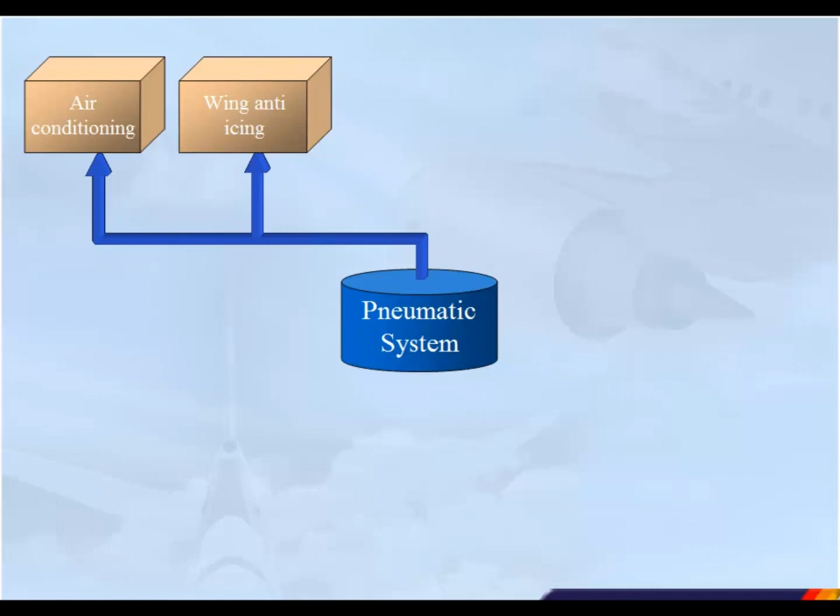The A330 pneumatic system supplies high-pressure air for air conditioning, wing anti-icing, water pressurization, hydraulic reservoir pressurization, and engine starting.

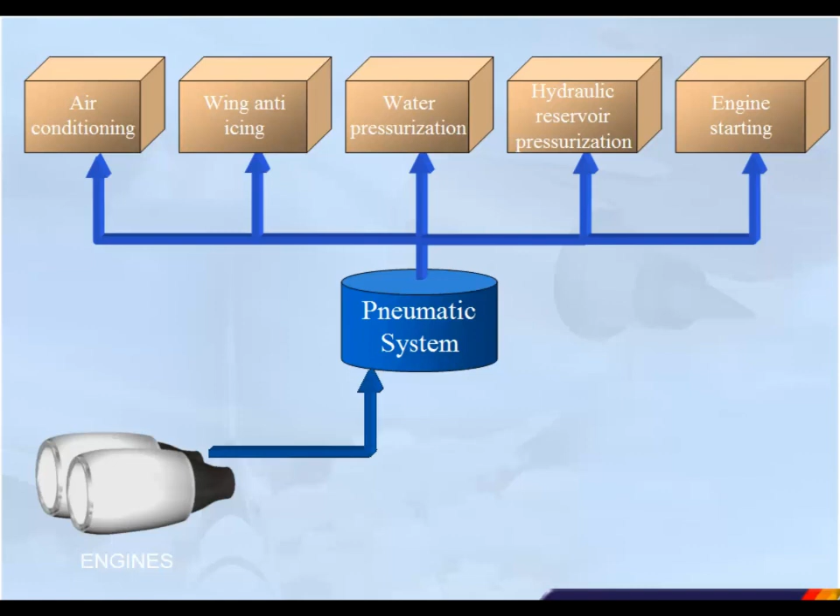High-pressure air can be supplied from three kinds of sources: the engine bleed system, the APU, and two external high-pressure ground power units. Note: wing anti-icing is not permitted when the pneumatic system is supplied by the APU bleed.

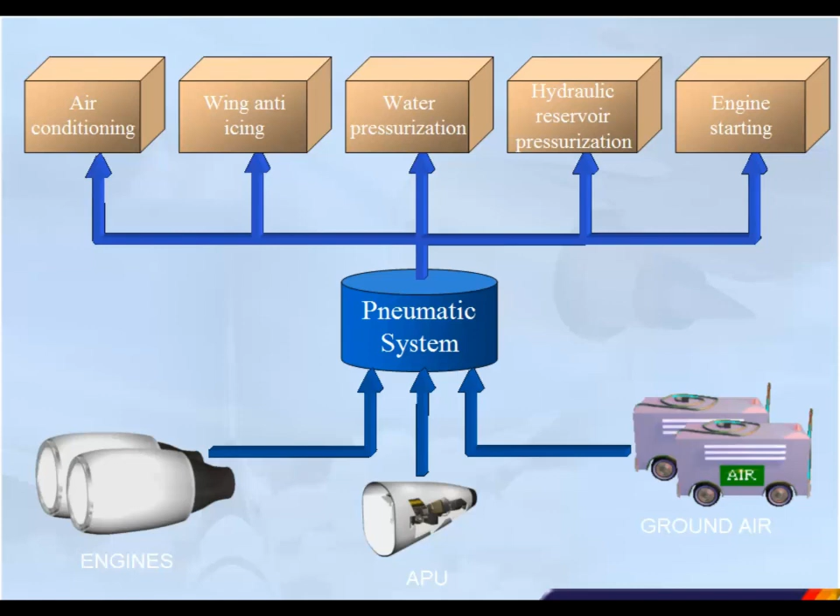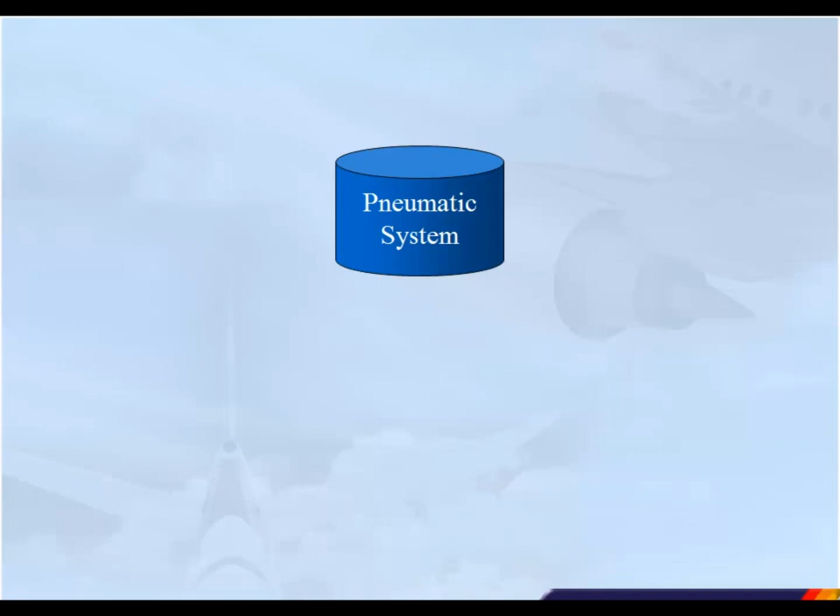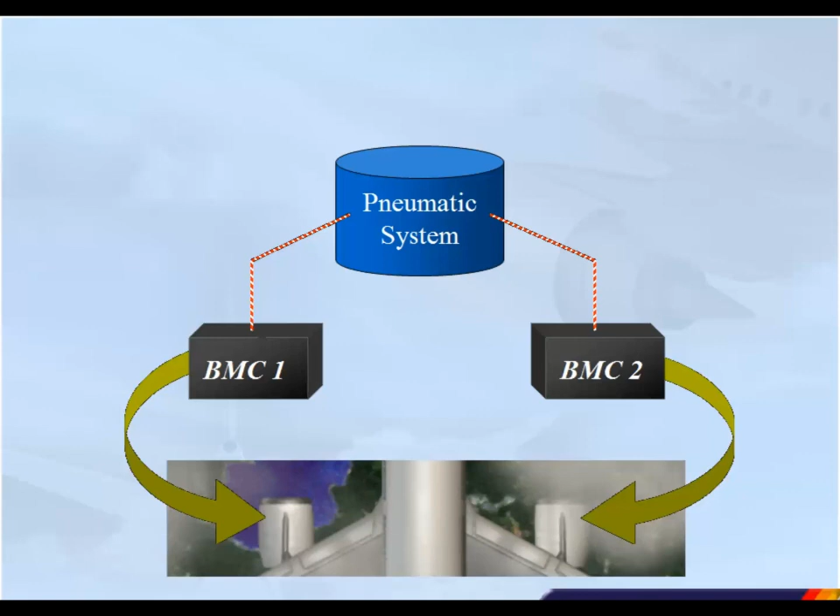The pneumatic system is controlled and monitored by two bleed monitoring computers, BMC. There is one BMC for each engine bleed system. Both BMCs are interconnected, and if one fails, the other takes over most of its functions.

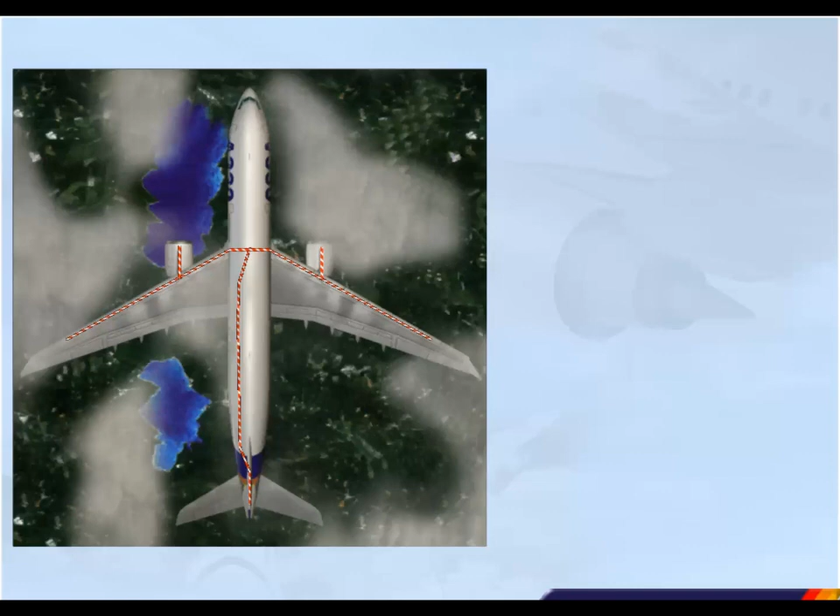There are air leakage detection loops installed in the vicinity of the hot air ducts in the fuselage, wings, and pylons. If a leak is detected, a signal is sent to the BMCs, which automatically isolate the affected area.

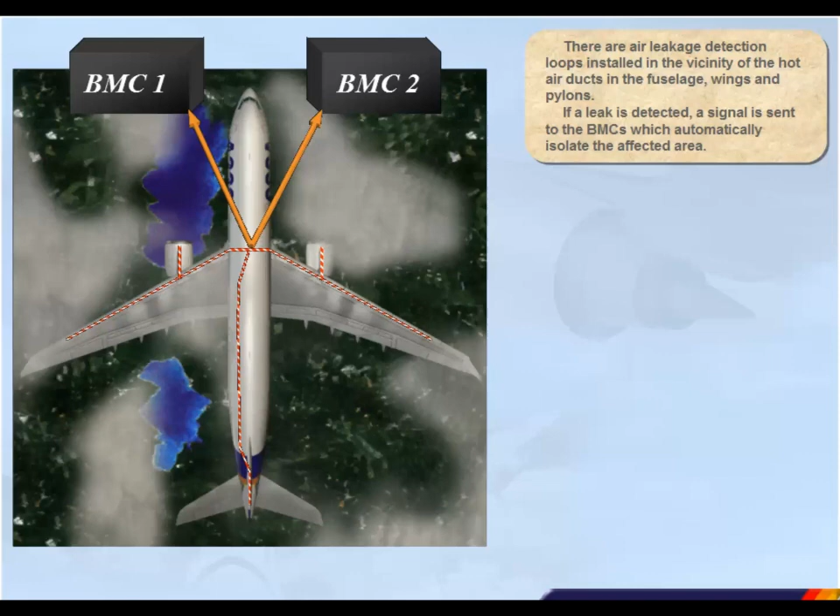In flight, the primary source of high-pressure air is the engines. Both engines' bleed systems are similar.

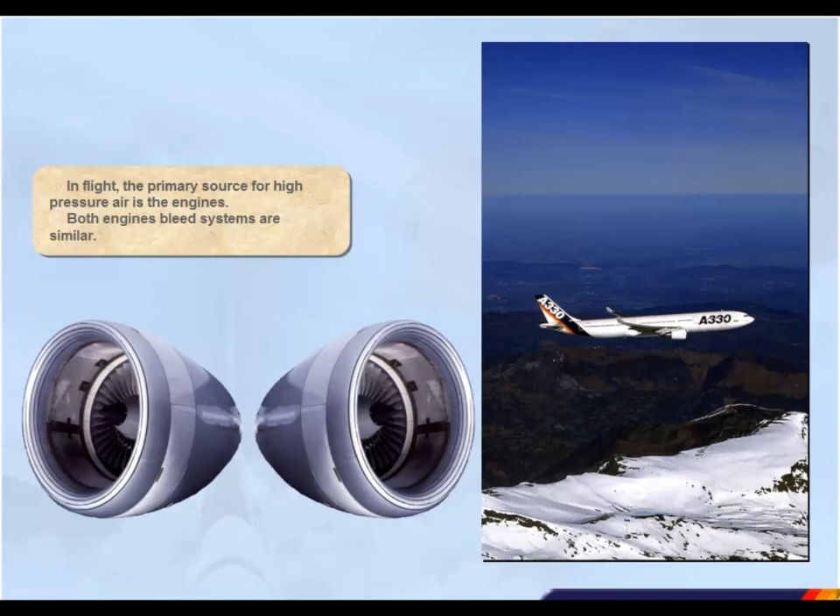Air is bled from two compressor stages of the engine: the intermediate pressure, IP port, and the high pressure, HP port.

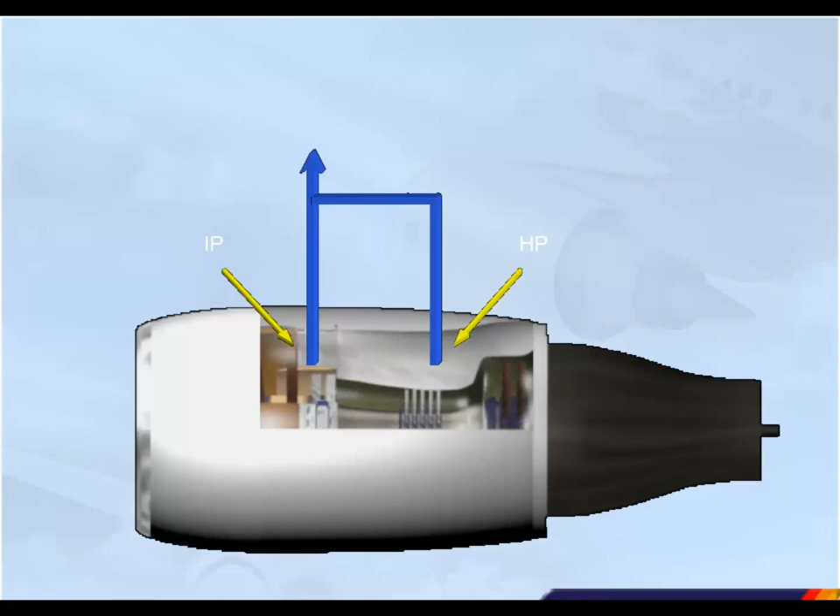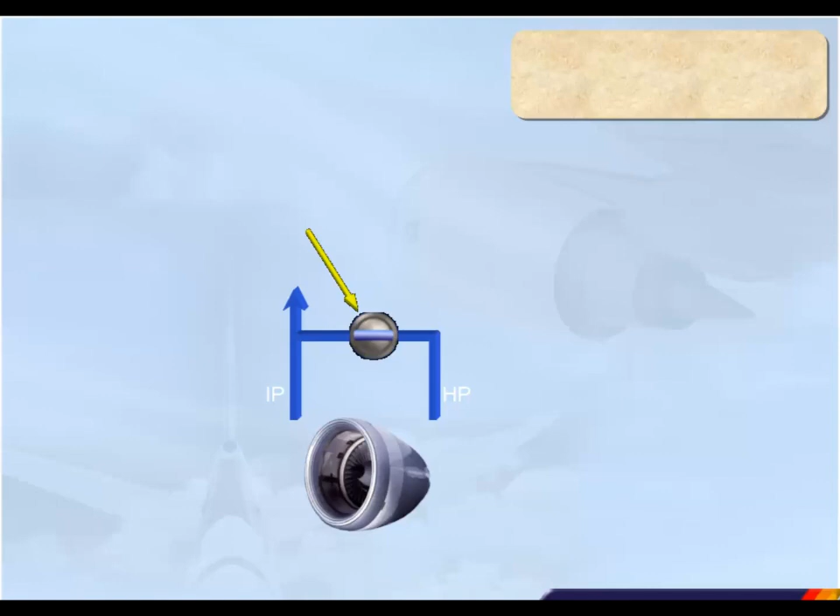There is an HP valve which can cut off bleed air from the high pressure port. It is automatically controlled by the system. The high pressure section, HP, is only used when there is insufficient pressure from the intermediate output, IP, i.e. when the engines are at idle. Once the engine speed is high enough, the IP is sufficient, and the HP valve closes.

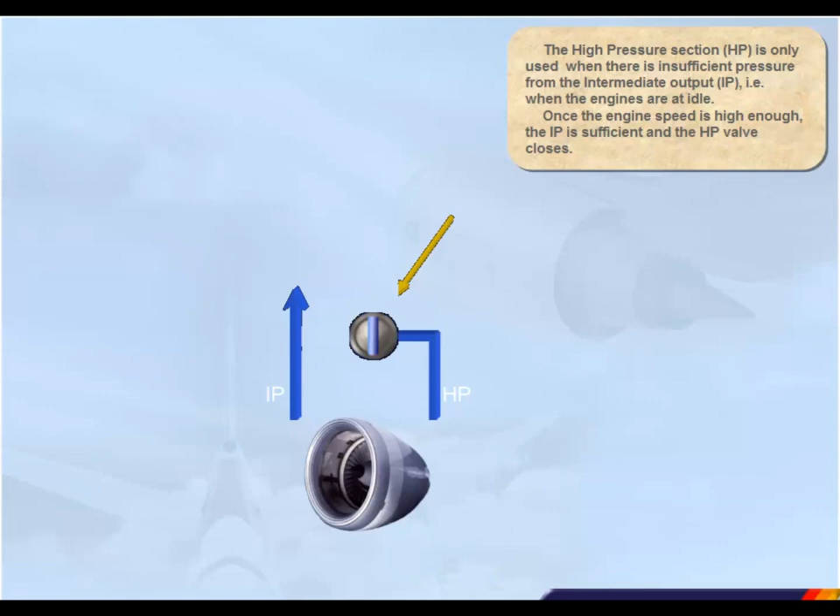The air extracted from the compressor then goes to a bleed valve, which acts as a shutoff and pressure regulating valve.

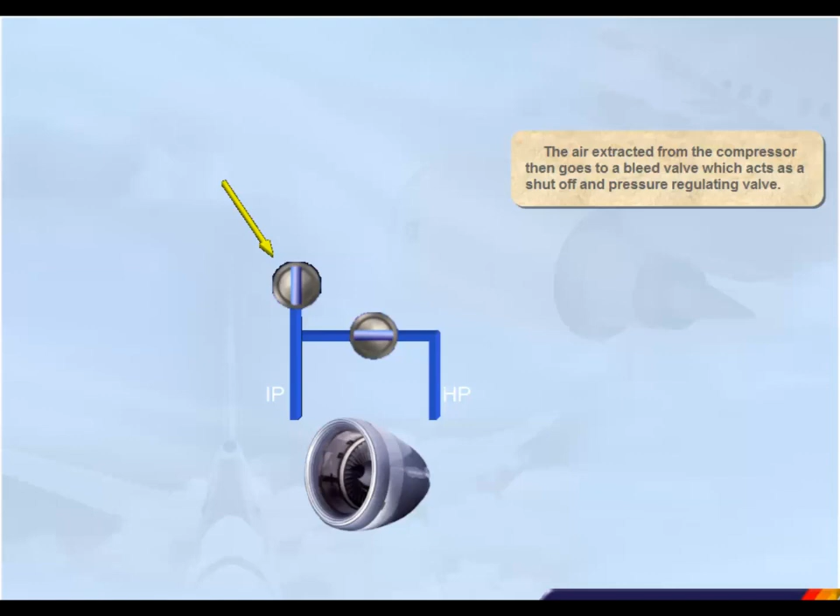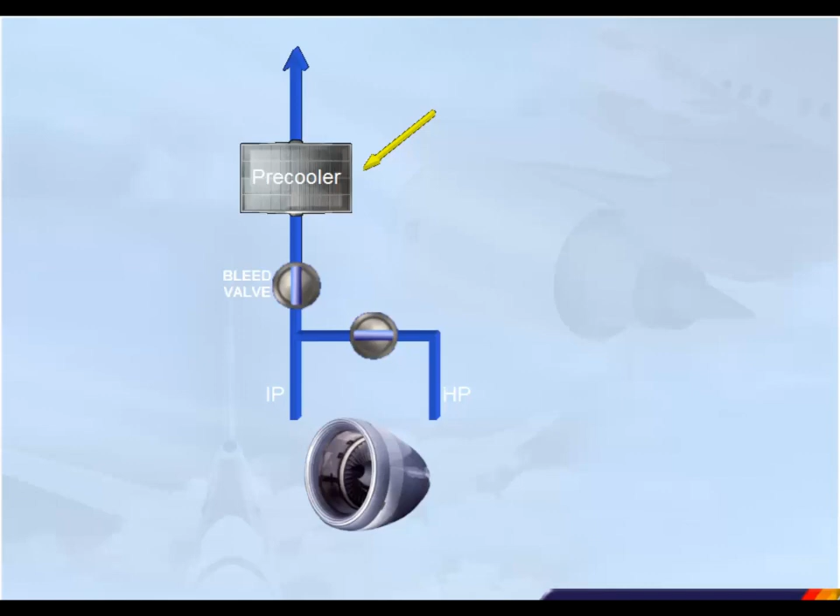Since the temperature of the bleed air is high, it passes through a pre-cooler before being distributed to the users. The pre-cooler uses cool air from the engine fan to regulate the temperature.

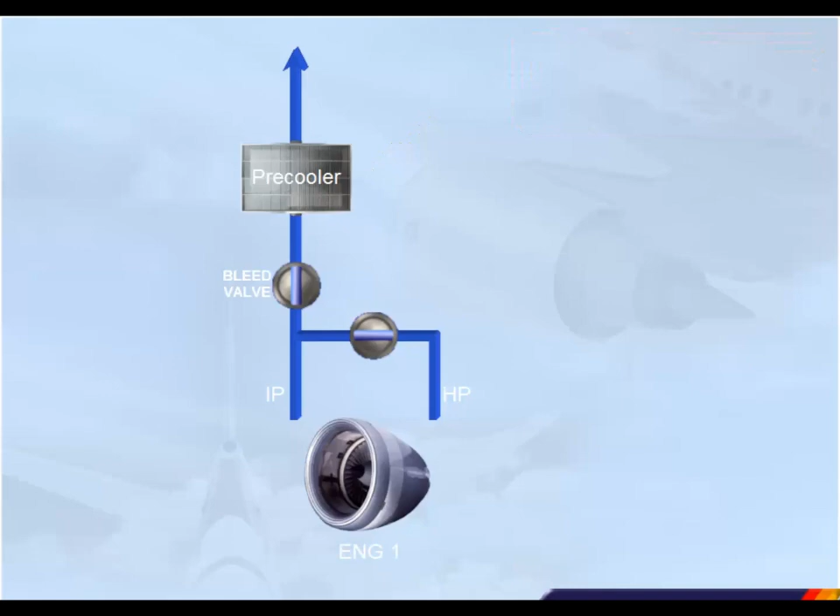Engine 2 has an identical bleed system. Click on the blue box to display the Engine 2 bleed system.

Both systems are connected by a crossbleed duct. A crossbleed valve permits their interconnection or isolation.

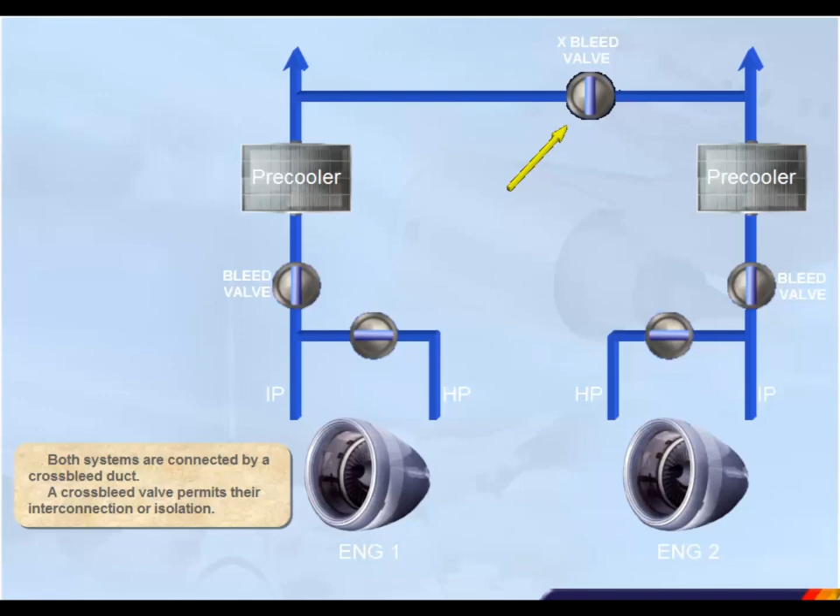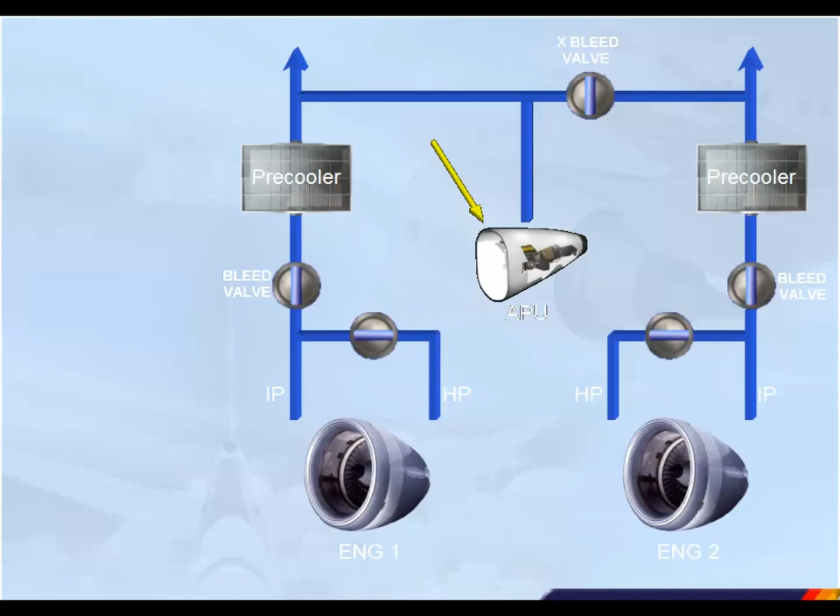The APU can also be used for bleed air supply. This is usually done on ground for air conditioning and for engine start. However, APU bleed air is also available in flight.

APU bleed air is controlled by the APU bleed valve, which operates as a shutoff valve.

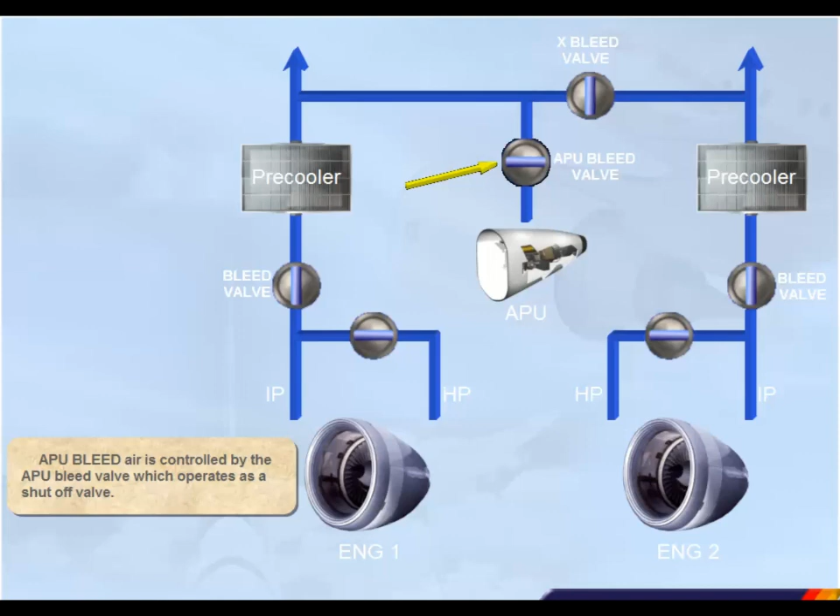Should the APU not be available, a high-pressure ground power unit can be connected. This completes the pneumatic system.

We will now show you how system information is displayed to the pilots.

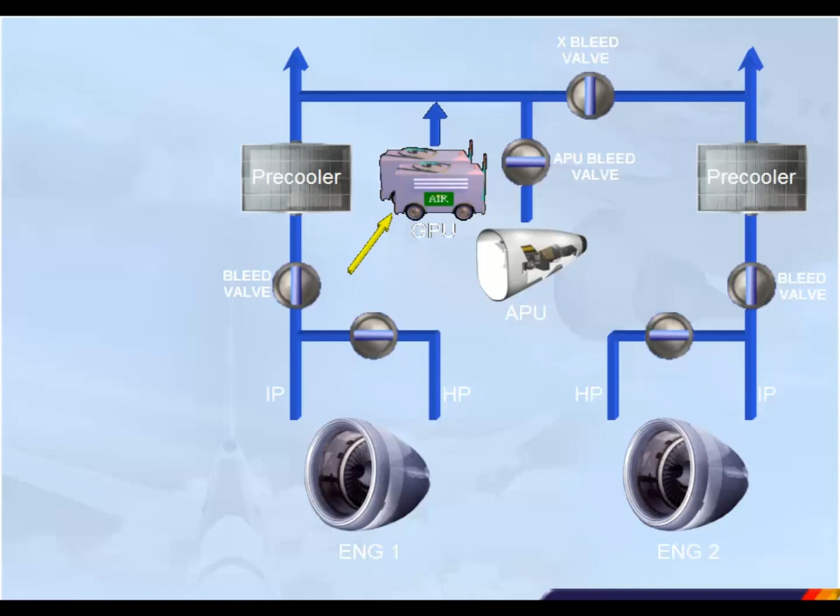The pneumatic system is displayed on the ECAM bleed page. Click on the diagram to display the ECAM bleed page.

Information on the pneumatic system is displayed on the lower part of the ECAM bleed page. Note, we have shaded the upper part of the ECAM bleed page because it is related to the air conditioning chapter. This will be covered in a later module.

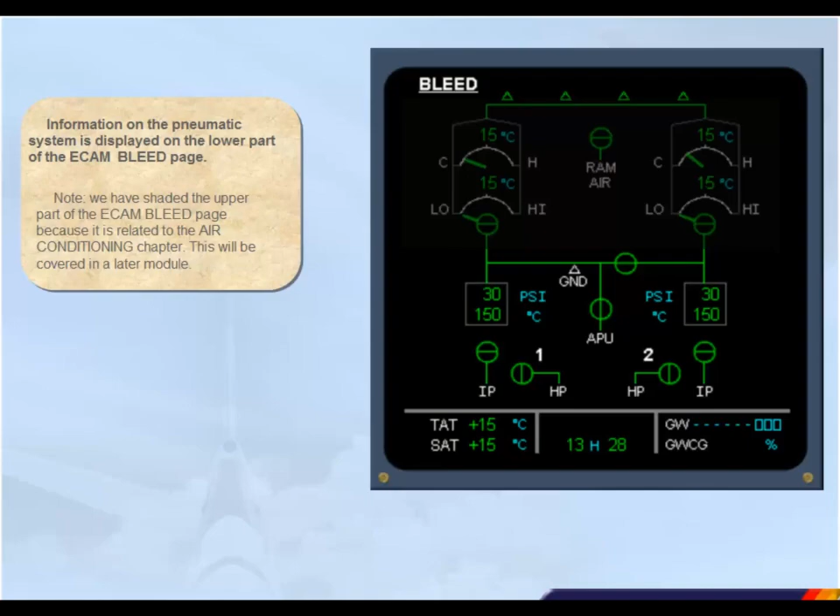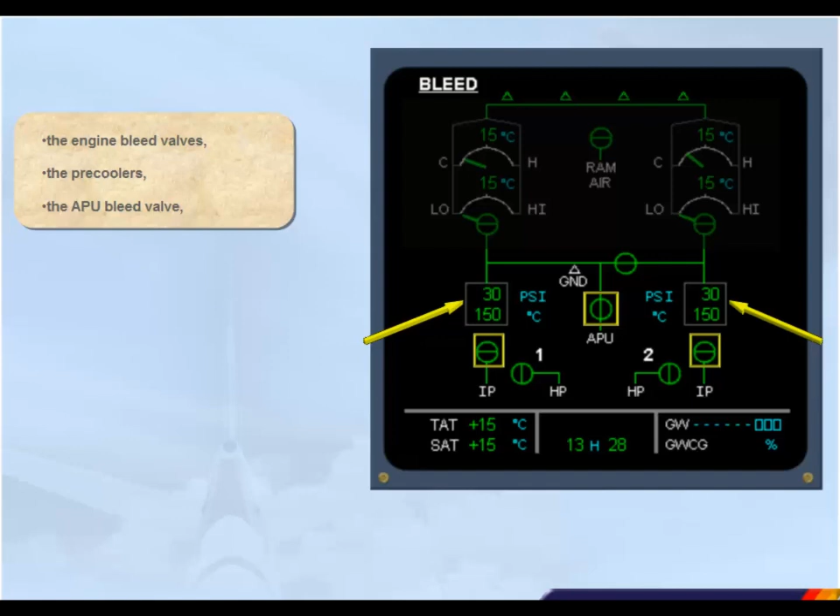Let's identify the system components on the ECAM page now: the IP and HP ports, the HP valves, the engine bleed valves, the pre-coolers, the APU bleed valve, the cross-bleed valve, and the high-pressure ground connection.

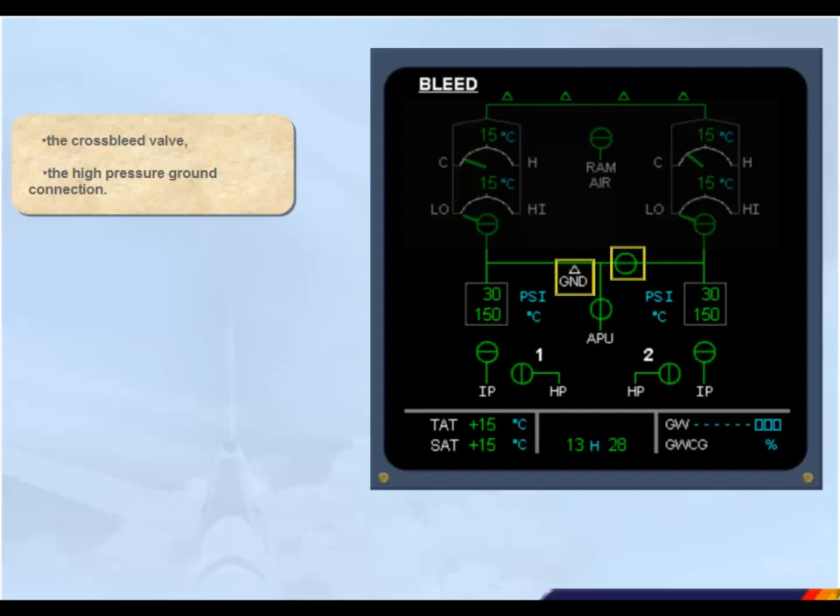The following information is also displayed: bleed air pressure, bleed air temperature, and engine identification numbers.

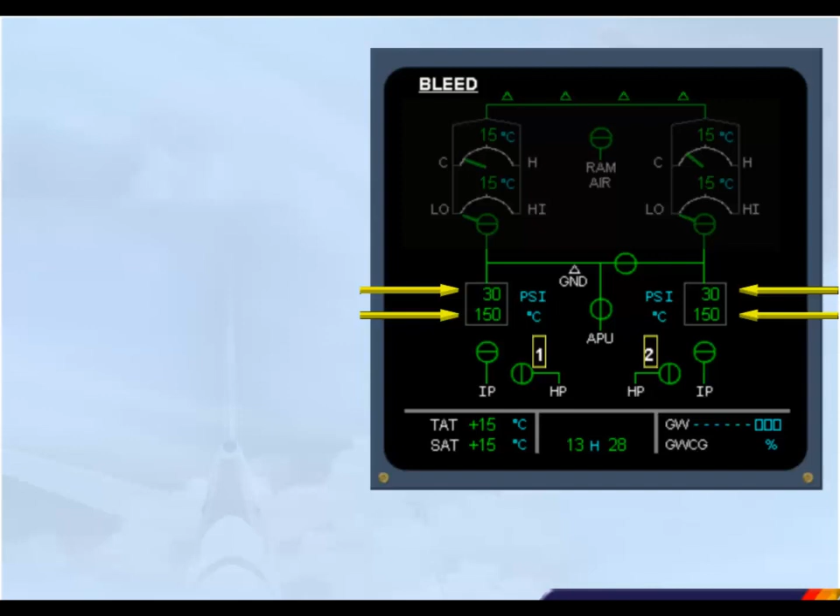Controls for the pneumatic system are part of the air conditioning panel, located on the overhead panel. Again, we have shaded those controls which belong to the air conditioning chapter.

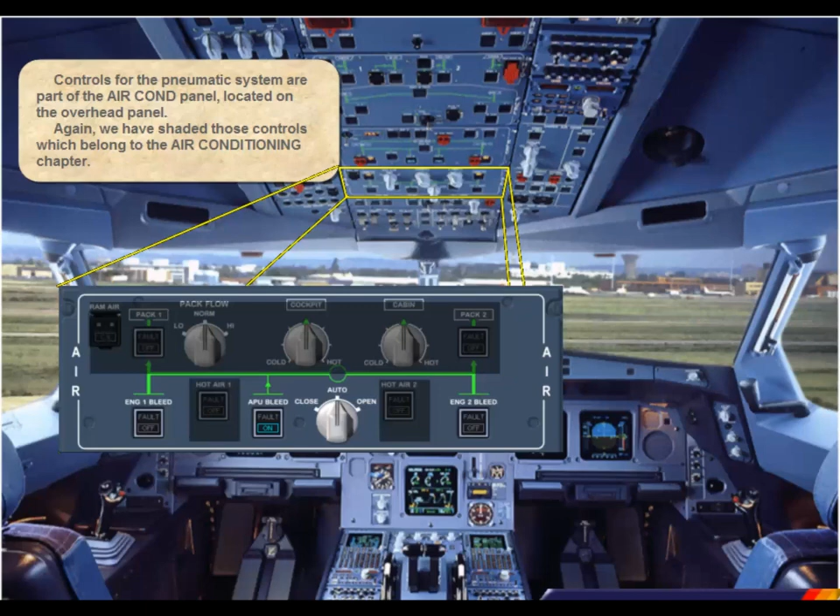Each engine bleed valve is controlled by its associated push-button switch on the air conditioning panel. The APU bleed valve is controlled by its associated push-button switch.

The cross-bleed selector enables the pilot to open and close the cross-bleed valve manually, or to let the system operate the cross-bleed valve automatically.

You will learn to interpret all the indications and operate these controls in the normal and abnormal operation modules.

You are doing the preliminary cockpit preparation. To better illustrate what occurs in the pneumatic system, select the ECAM bleed page using the ECAM control panel.

Let's talk about the indications on the ECAM bleed page. The engine identification numbers are displayed amber because the engines are not running.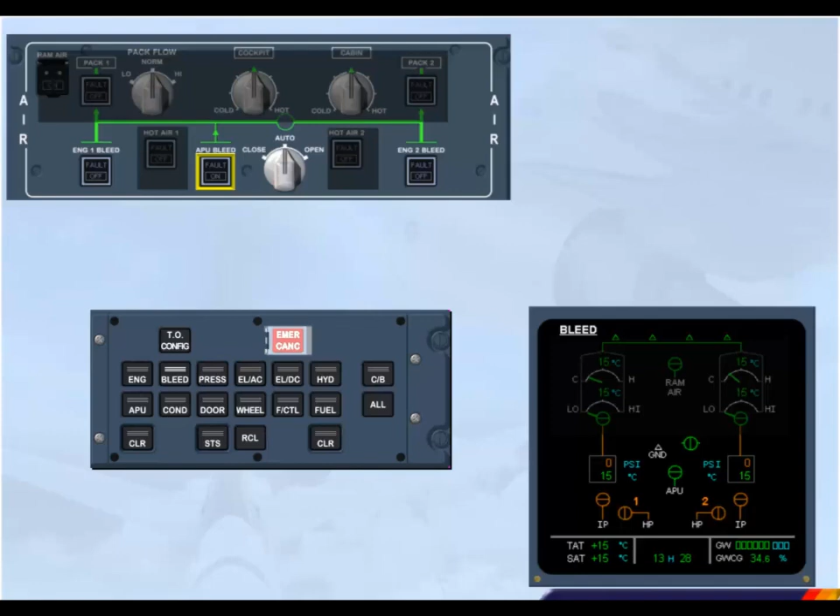Since the APU bleed push-button switch is selected off with APU running, the APU bleed valve is displayed cross-line green, indicating that it is closed.

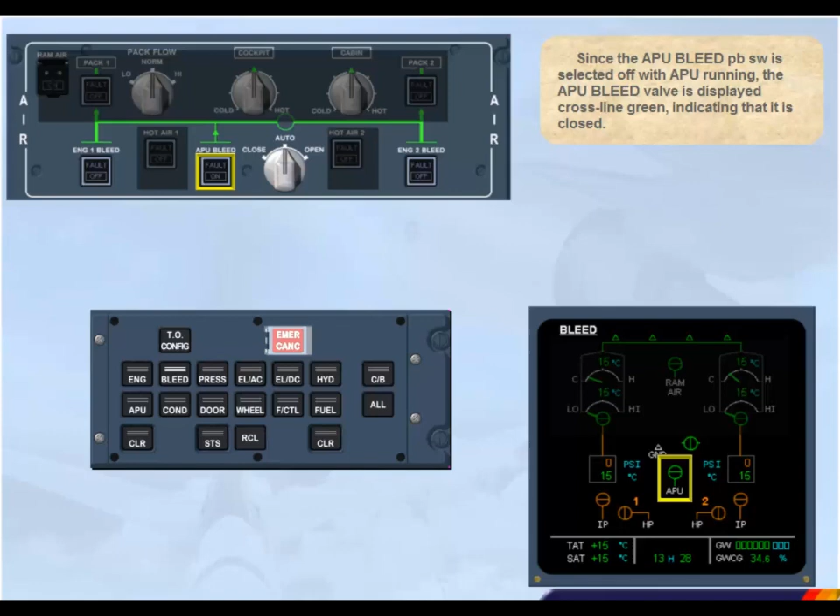The next step during cockpit preparation is to switch the APU bleed on. We have already started the APU for you. Note, do not use APU bleed if ground high pressure air is connected. Switch APU bleed on.

Observe the indications. The APU bleed valve is displayed inline green, indicating it is now open. The left side bleed pressure and temperature are displayed in green because they are in the normal range. The crossbleed valve is automatically opened, displayed amber during transit and inline green when fully open. The right side bleed pressure and temperature are now also displayed in green. As you have learned in the APU chapter, the memo APU bleed is displayed on the engine warning display.

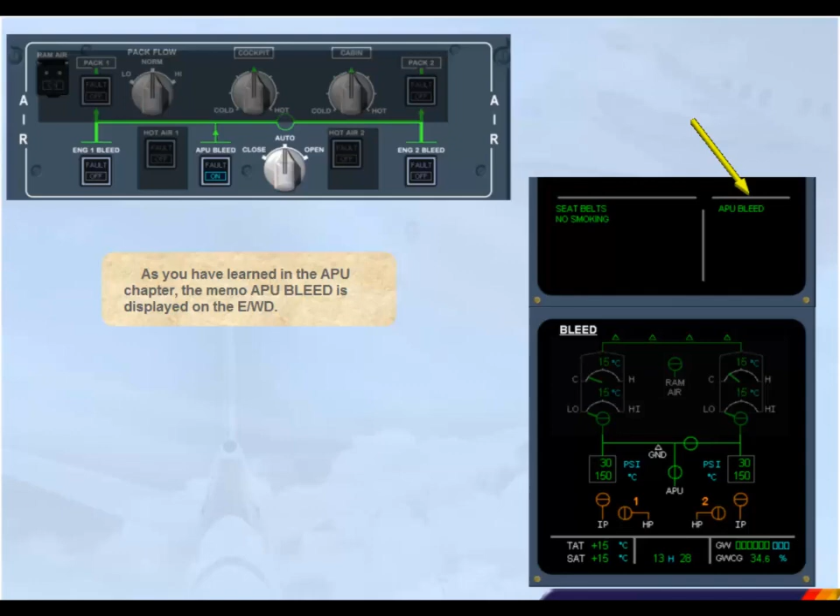The next step is the walk-around. If ground high-pressure air is not required, you have to check that the high-pressure ground connection door is closed.

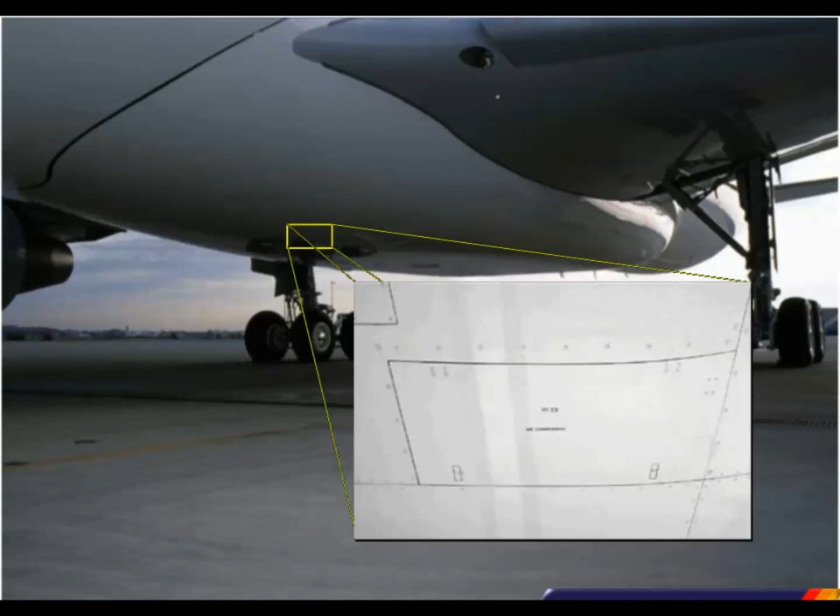Usually, APU bleed air is used for engine start. The pressure displayed on the bleed page is also indicated on the ECAM engine page, which will be explained in the engine chapter.

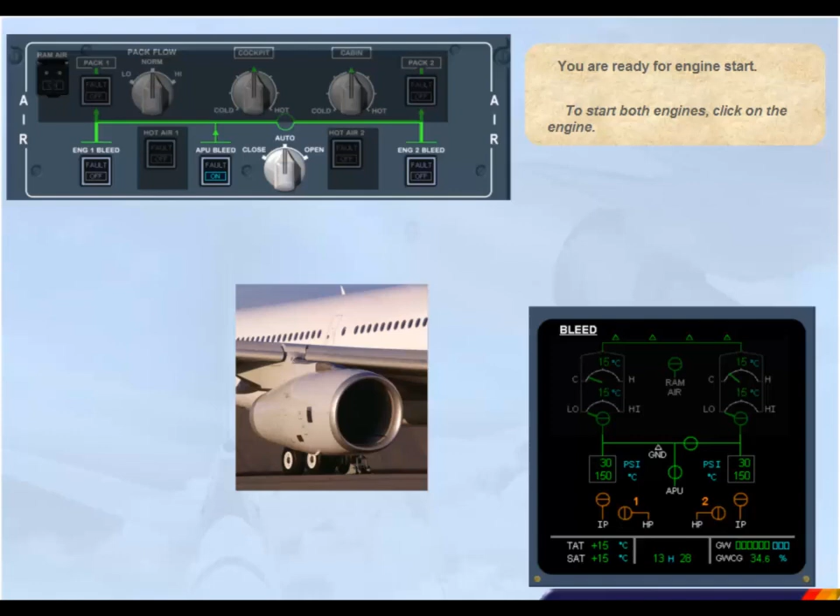You are ready for engine start. To start both engines, click on the engine. Notice that the engine identification numbers have turned white, indicating that the engines are running. The engine bleed valves remain closed because the APU bleed valve is open, and the APU has priority over the engine bleed.

Now you may switch off the APU. Switch APU bleed off. Observe the ECAM.

The APU bleed valve is closed. The crossbleed valve is automatically closed, displayed amber during transit. The engine bleed valves and HP valves are displayed inline green because they have been automatically opened.

We will now switch off the APU. Click on the APU master switch. With the APU master switch push button in the off position, the APU bleed valve is no longer displayed on the ECAM.

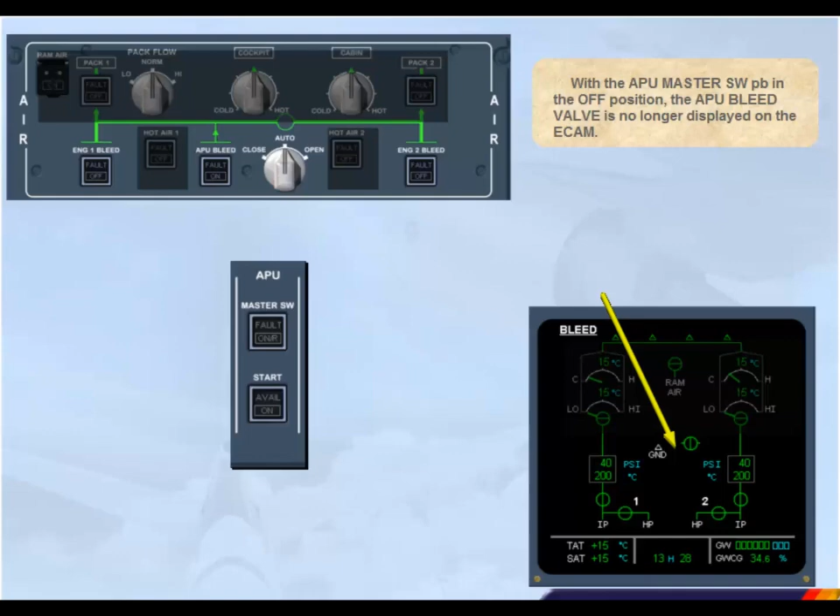We will now talk about the changes that occur in the pneumatic system during takeoff. Note, normally the ECAM engine page is displayed for takeoff. For training purposes, we will display the ECAM bleed page.

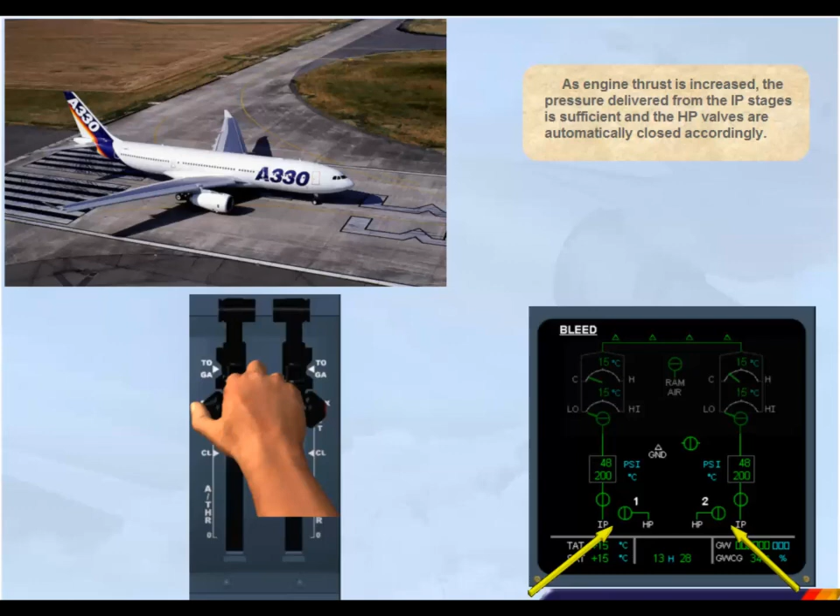As engine thrust is increased, the pressure delivered from the intermediate pressure stages is sufficient, and the high pressure valves are automatically closed accordingly. As soon as the aircraft lifts off, the ground high pressure connection indication disappears. Remember that it is only displayed on the ground.

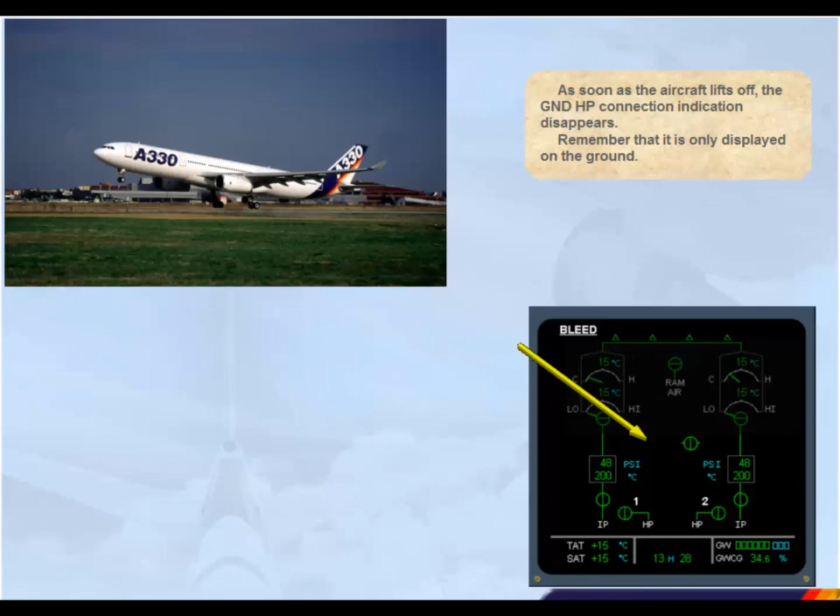During flight, you may need to switch on the wing anti-ice system, which uses hot bleed air from the pneumatic system. Observe the indication on the ECAM bleed page when the wing anti-ice is used. Note, for further information, refer to the Ice and Rain Protection chapter. Wing anti-ice is not permitted when the pneumatic system is supplied by the APU bleed.

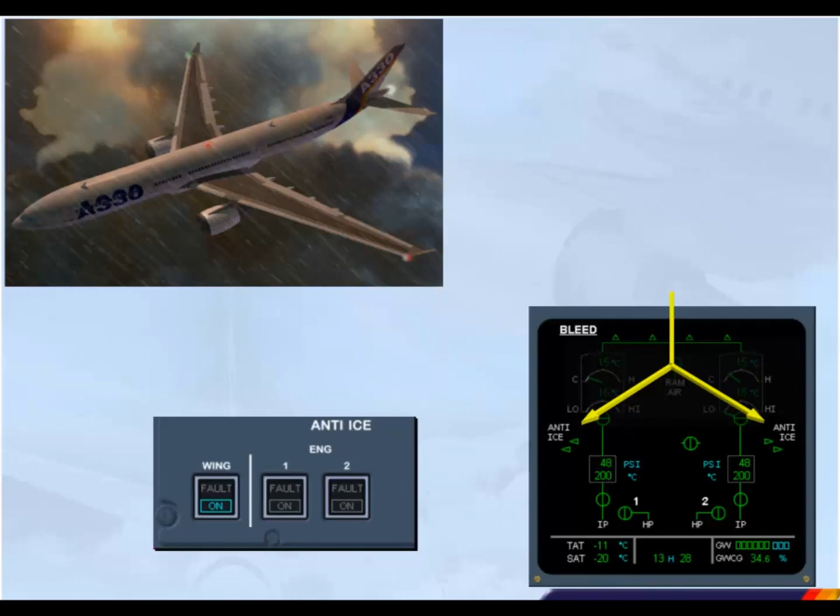Let's now see what happens in the pneumatic system when you are back on the ground. The ground high pressure air connection indication is displayed. With the engines at idle, the high pressure valves are automatically opened. When the APU is started, the APU bleed valve is displayed.

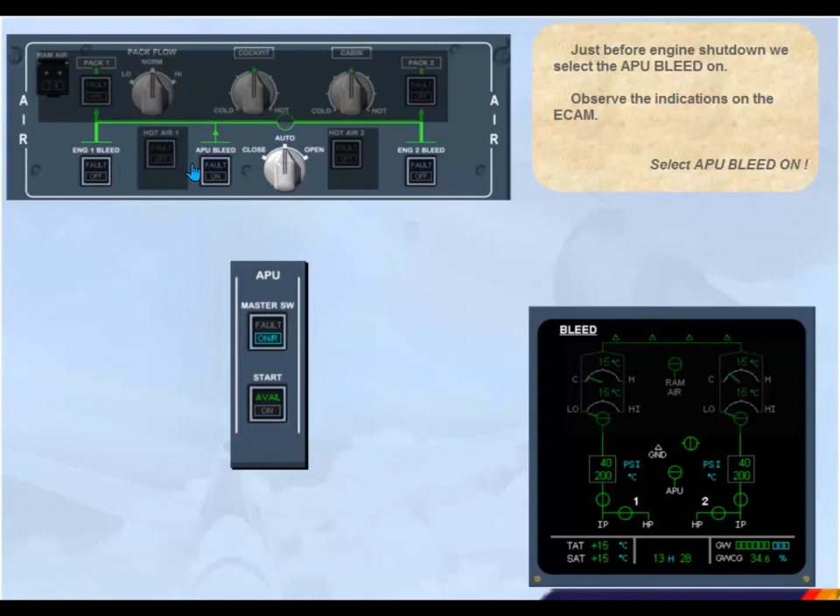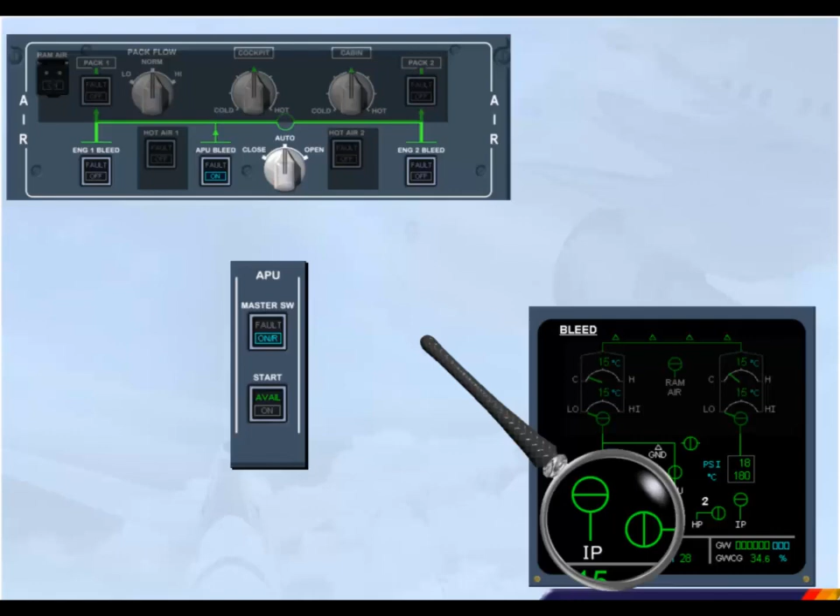Just before engine shutdown, we select the APU bleed on. Observe the indications on the ECAM. Select APU bleed on. The APU bleed valve opens. The engine bleed and high pressure valves are automatically closed because APU bleed air has priority. The cross bleed valve automatically opens in order to let the APU supply both sides of the pneumatic system.

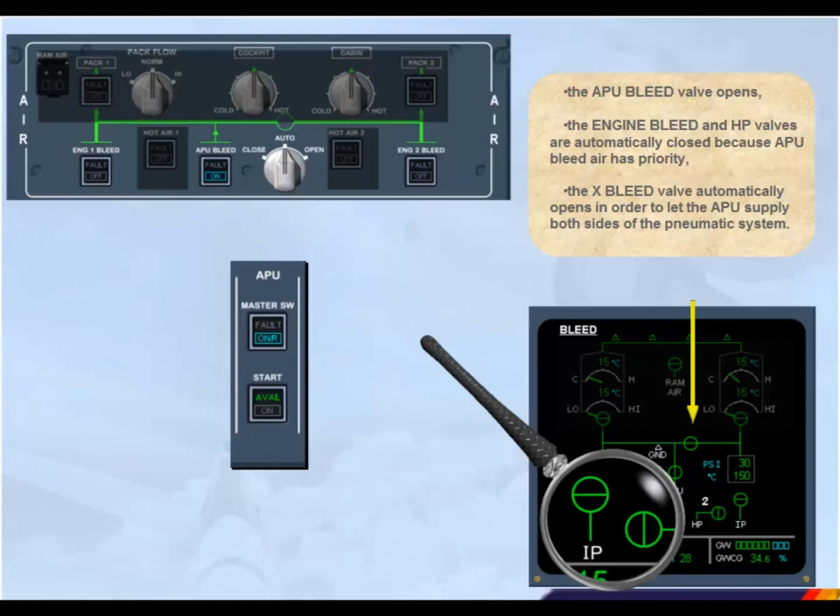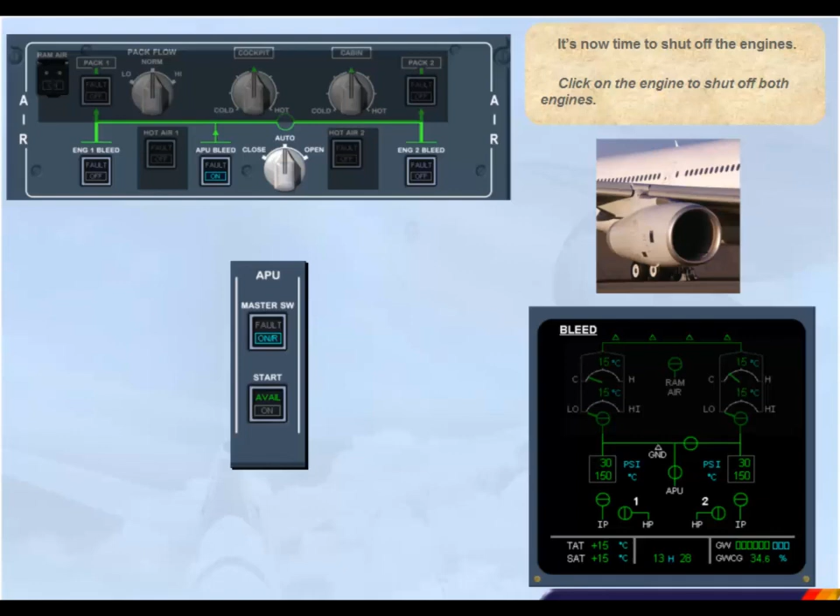It's now time to shut off the engines. Click on the engine to shut off both engines. Observe that the engine identification numbers turn amber because the engines are not running.

Before leaving the aircraft, we will shut down the APU. But first, we must switch off the APU bleed. Switch APU bleed off. Observe the indications. The APU bleed valve is closed. The bleed pressure is displayed amber because there is no pressure supplied.

When the APU has shut down, the APU bleed valve is no longer displayed. This completes the normal operation of the pneumatic system. We will now discuss the indications associated with ground high pressure air supply. Click on the forward arrow.

If the APU is inoperative for bleed air supply, a ground high pressure air unit can be connected to provide pneumatic pressure for engine start. The ground unit's pressure and temperature are indicated on the ECAM.

Notice that in this case, the crossbleed valve remains closed with the crossbleed selector in auto position. In order to start engine 2 first, you have to set the crossbleed selector manually to open. This is done according to the procedure in your FCOM.

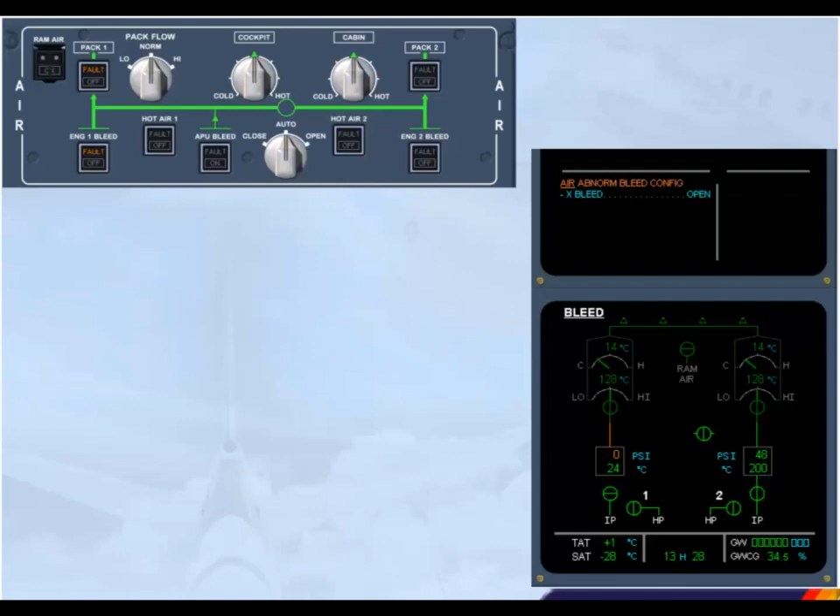Observe the ECAM. The cross-bleed valve is displayed amber during transit and inline green when fully open. The pressure and temperature values for the left side of the system are back to normal because now both sides are being supplied by engine 2.

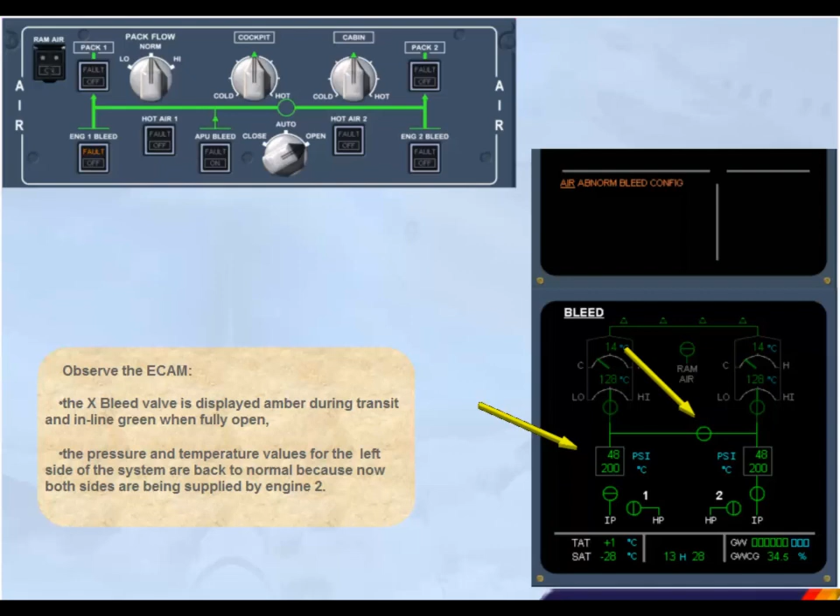After review and confirmation by the pilot flying, clear air.

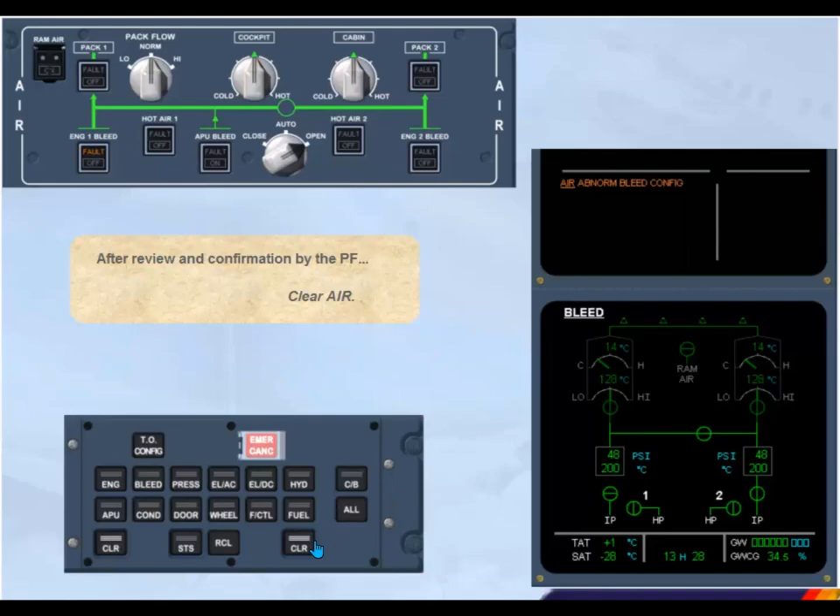If you need to use wing anti-ice, you will have to switch off one air conditioning pack. We will deal with this fact later. In the inoperative systems column, engine 1 bleed is listed.

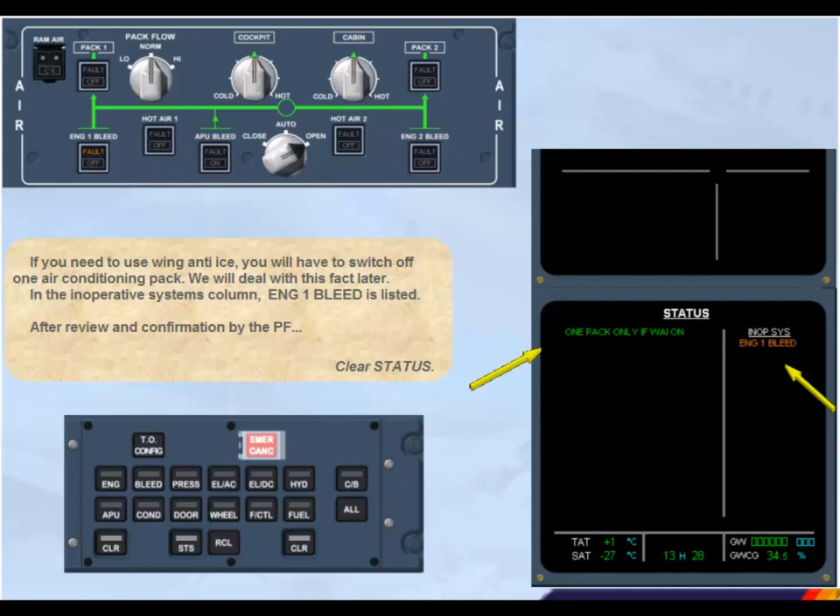After review and confirmation by the pilot flying, clear status. ECAM action completed.

Now we will see what happens if you have to use wing anti-ice with the engine 1 bleed still inoperative. Let's assume you encounter icing conditions during the remaining part of your flight, and you decide to switch on your wing anti-ice. Switch wing anti-ice on.

The engine 1 bleed fault procedure is automatically recalled on the engine warning display, and the ECAM procedure requires that you switch pack 1 off. This is because one engine bleed system is not sufficient to supply wing anti-ice and both air conditioning packs at the same time. Note: for more information about the packs, refer to the air conditioning chapter.

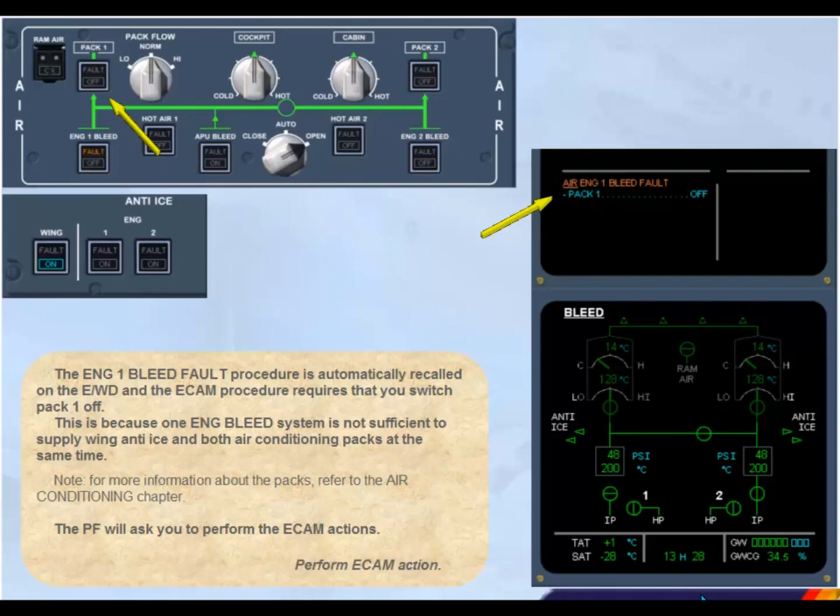The pilot flying will ask you to perform the ECAM actions. Perform ECAM action. After review and confirmation from the pilot flying, clear air.

On the status page, Pack 1 has been added to the inoperative systems column.

After review and confirmation by the pilot flying, clear status. ECAM action completed.

For training purposes, to teach you more about the pneumatic system, we will continue by adding another failure to your previous configuration. This will be a left wing leak. This does not seem to be your lucky day. Click on the forward arrow to activate the failure.

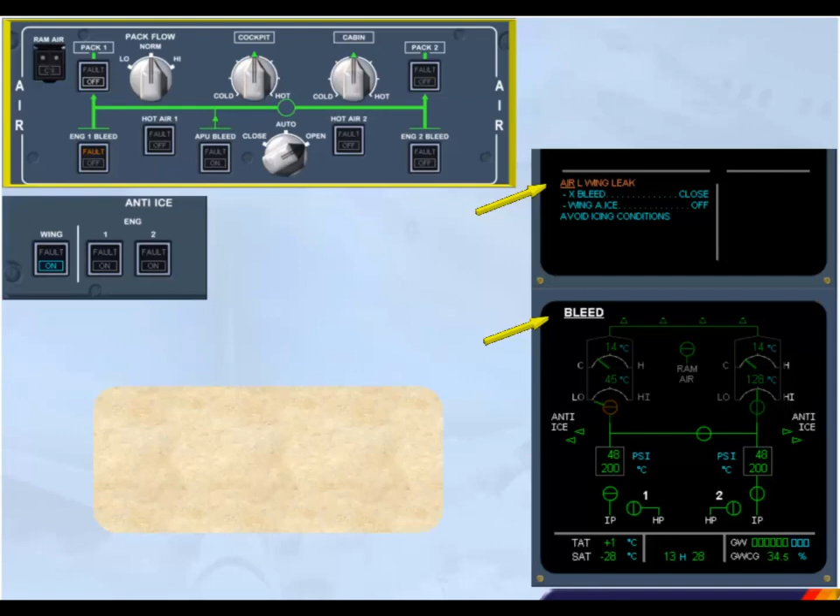On the engine warning display, read the title of the failure. On the system display, the ECAM bleed page is automatically presented. On the air panel, the indications from the previous failure remain unchanged. The title of the failure indicates that a bleed leakage in the left wing has been detected. The left side of the bleed system has to be shut down in order to prevent any damage from leaking hot air.

The first line of the ECAM procedure requires you to switch the crossbleed selector to the closed position. With the selector in auto position, the crossbleed valve would have been closed automatically, but remember, you have opened it manually in the previous procedure.

The pilot flying will ask you to perform the ECAM actions. Perform ECAM action.

Observe the indications. The crossbleed valve closes. The pressure of bleed system 1 returns to 0. Since there is no hot air supplied, the left wing anti-ice valve indication becomes amber. The wing anti-ice indications will be explained further in a later module.

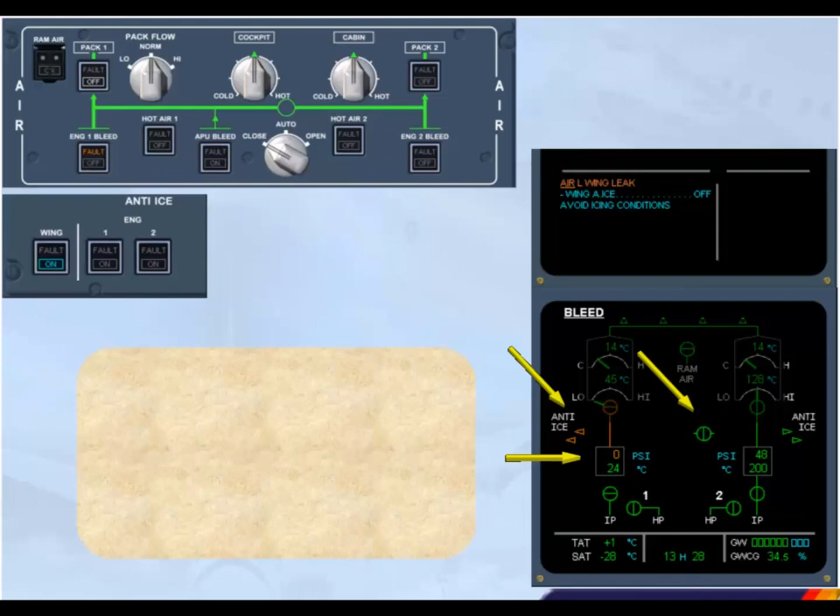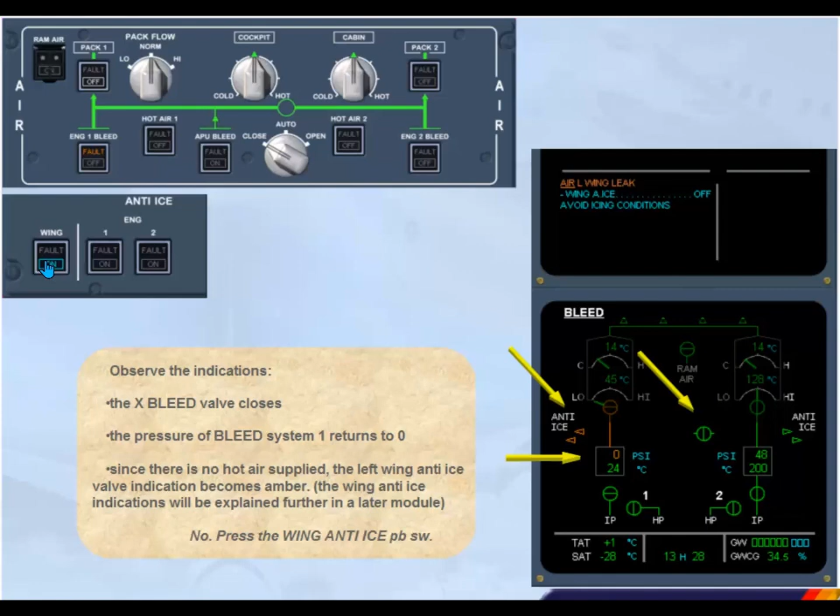Continue ECAM action. No. Press the wing anti-ice push button switch. The wing anti-ice was switched off because you do not want to de-ice one wing only.

The ECAM advises you to avoid icing conditions for the remaining part of the flight. After review and confirmation from the pilot flying, clear air.

The status page also informs you that you have to avoid icing conditions. The wing anti-ice has been added to the inoperative systems column. The engine 1 bleed and pack 1 remain from the previous failure.

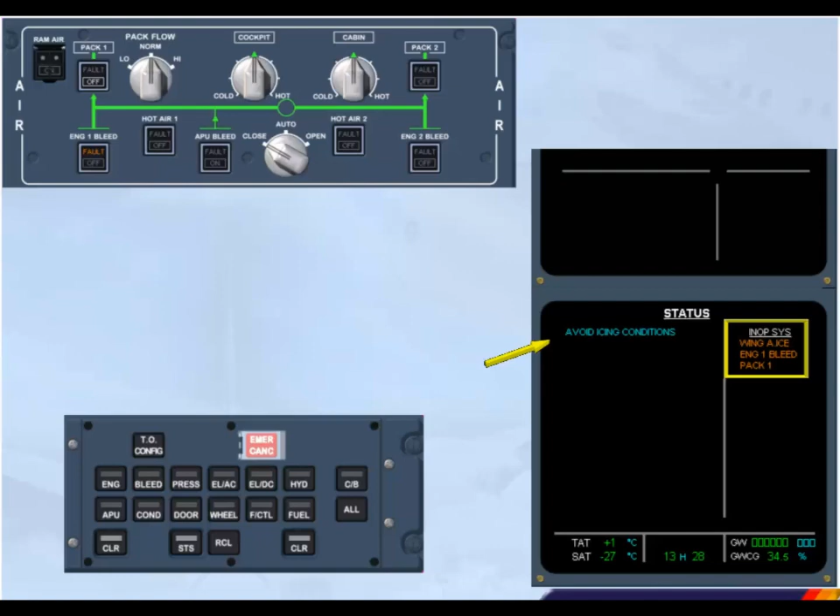After review and confirmation from the pilot flying, clear status. ECAM action completed.

We will now briefly look at several abnormals, without performing the procedures, to see the remaining indications of the pneumatic system.

In normal operation, when you use APU bleed, the crossbleed valve automatically opens. If it fails to open, an ECAM caution is triggered, and the crossbleed valve is displayed crossline amber to indicate disagreement.

Conversely, if the crossbleed valve fails to close in automatic mode, e.g. after the APU bleed has been switched off, it is displayed inline amber accompanied by an ECAM caution. Accordingly, the engine bleed valves and the HP valves are displayed amber if their position disagrees with the normal position.